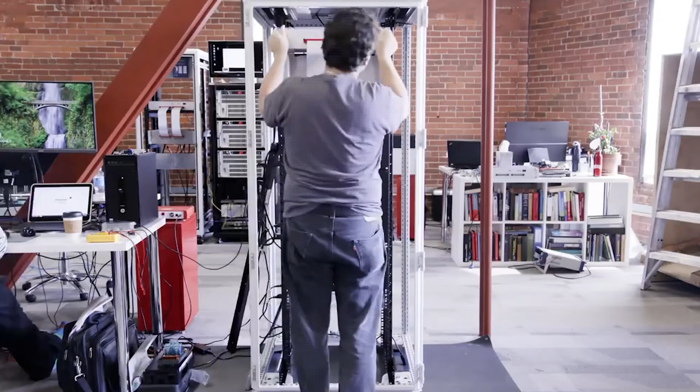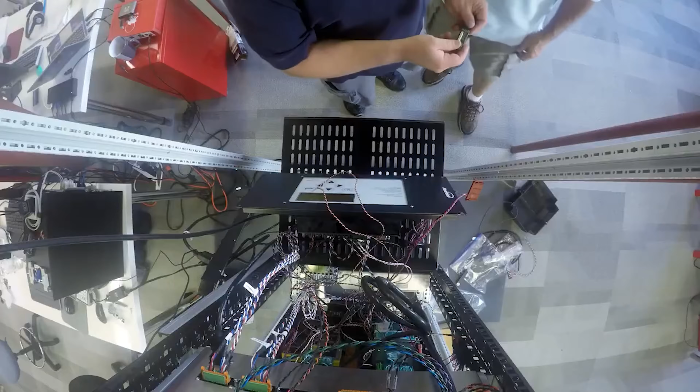So one of the big challenges for us in the project we did at Otis was to understand the way components would behave when they were connected in a relatively unique configuration. You can have emergent behaviors that can really be problematic, especially if it's on a military installation where having the system up and operational is particularly important because the people who are utilizing that electrical service are very sensitive to interruptions. What the HIL has allowed us to do is be able to preempt these emergent behaviors and predict them before we would actually encounter them in the field.

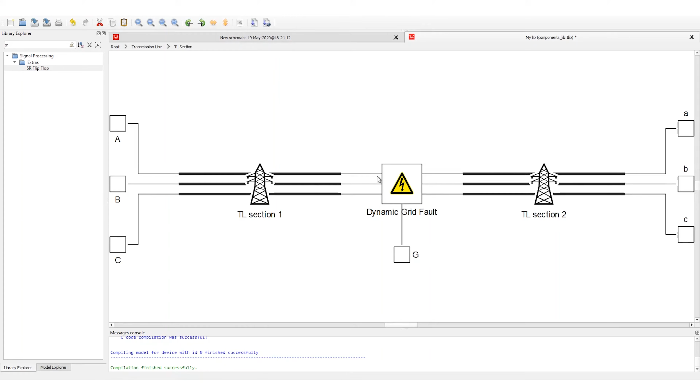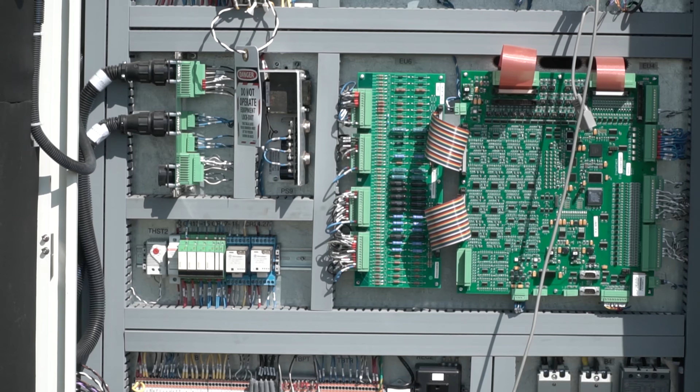It's been really advantageous to be able to simulate those system integration issues with high fidelity. In our prior projects, our lead software engineer would sit in an inverter room until midnight trying to get interfaces to work. And now, because of the C-HIL, we're able to get that all done preemptively up front. Usually to run through our full test plan within the HIL environment, we can do it within a few days.

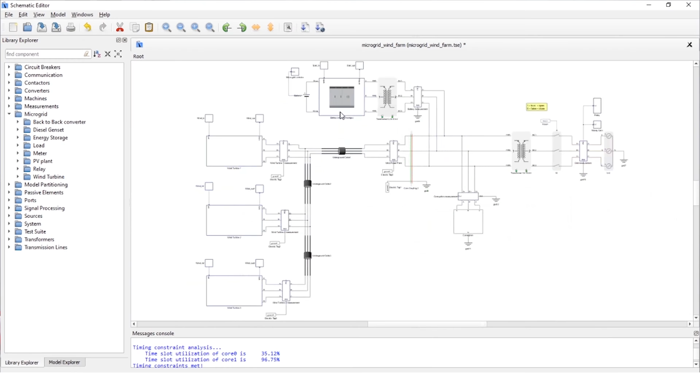The controls and how they would behave were more important than the actual powered devices themselves. And that was the reason why we thought the C-HIL methodology was more appropriate for us. The logistics and convenience associated with being able to simulate large-scale systems versus doing that all in power hardware, which takes really specialized facilities that not many people have access to.

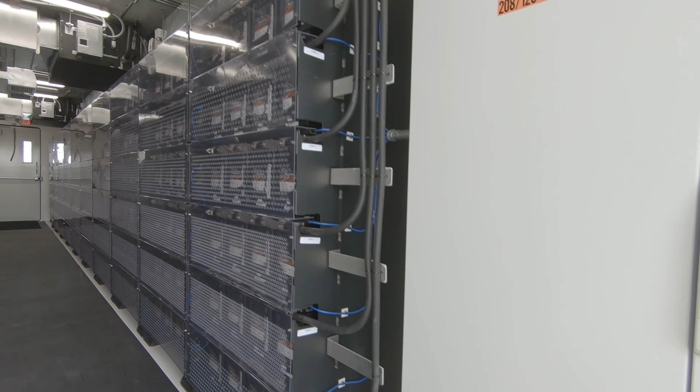The controls that we've done is a supervisory level microgrid controller, which is primarily concerned with dispatching various generation elements. We're integrating a lot of commercially available equipment, which is not inherently very secure. So for these military applications, we need to be able to add an additional level of security to pass muster.

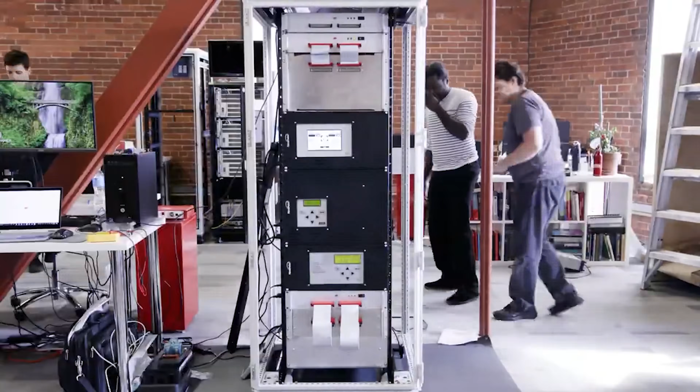And our control system, putting together all of the interfaces between the simulation and the physical controls is time consuming, and that's something that Typhoon has largely done, making sure that we had the simulation configured in the way we needed it configured in order to run the test cases.

What we've been doing for our microgrid control testing has been based off of the IEEE 2030.8 standard. If you have a system that you can say has been tested in accordance with standards requirements, that provides a sufficient level of test coverage.

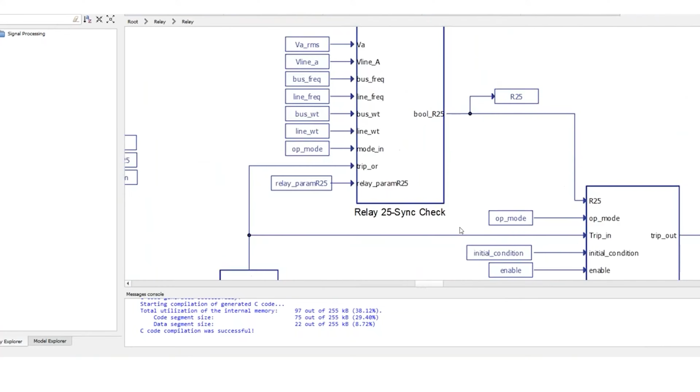We've seen instances in which you might have detection and control settings that are acceptable for grid-tied operation, where during islanded operation you have transients that occur that could cause protective relays to trip. We've also seen instances in which sequencing of the way that you control various generation elements within the system, where if you don't sequence those operations properly, dynamics arise that will trip parts of the system offline.

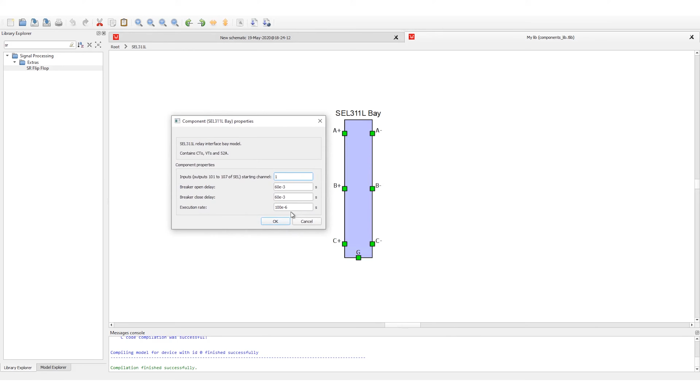And it's powerful because you can change what you're doing and you can explore other potential possibilities quickly and easily. And it builds confidence in your customer. It allows you to de-risk your technology. It allows you to better plan and execute your projects.

As more and more things are electrified, you're going to see more and more instances where you really need to have some kind of high fidelity emulation. So we're just glad that we're already down that path in the work we're doing, and it's going to be indispensable.